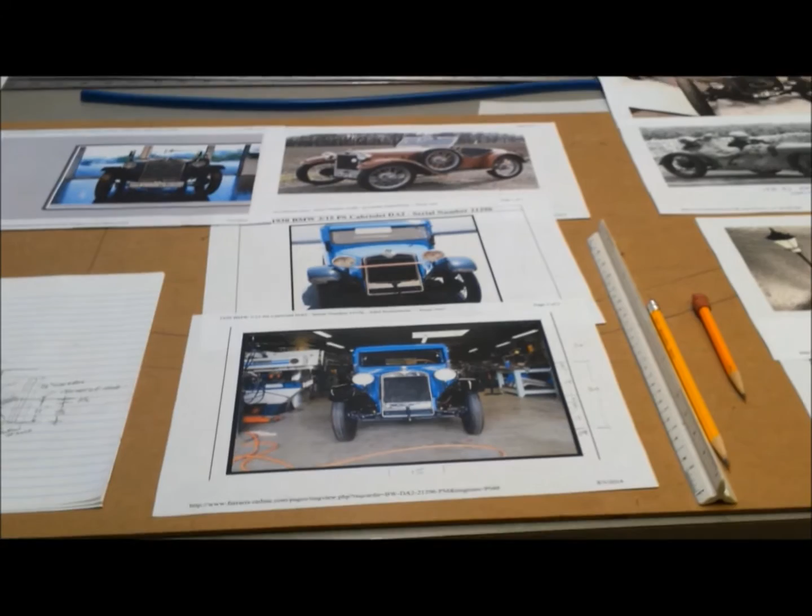Because this front suspension is different than my other two carts, it's a little bit more challenging than first time around. So I've been studying, and I went and printed some more photographs. I'm really trying to get a feel for the front suspension.

Here's a finished view, what it should look like. Try to get it somewhat in scale. Here's another view that helps. And then I've already seen this one. And in the course of printing photos, I came across a few more shots that'll help me when I'm trying to get the body to look the way I want. There's a nice one. Here's one from above.

Cute little car. There was also a racing version, special racing version. I think it's a body kit that somebody sold. But here's another racing version without the fenders. So anyway, and there's one more picture there, which I thought was a nice shot.

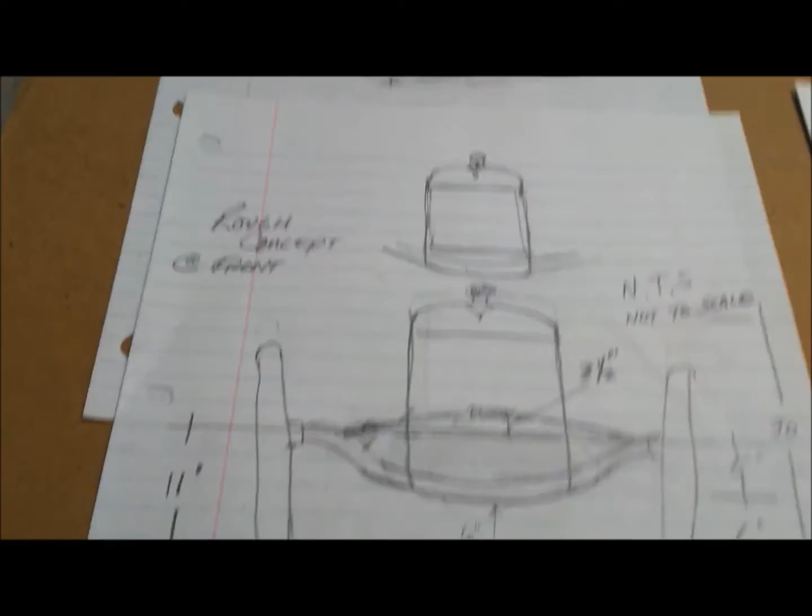Okay, so where I left off last time on getting this front suspension right was this drawing here. But I really hadn't studied the photos that close, so I did a couple of sketches, trying to figure out where the axle comes through, concept. This one's not to scale. I've got one of Brian's axles here, and I have a Brian spring on the cart that he's working on, so I was able to get some measurements.

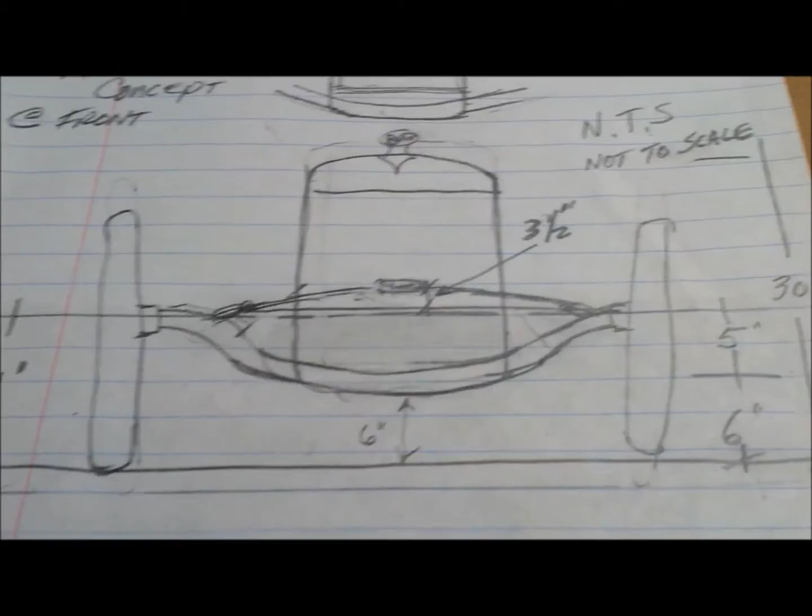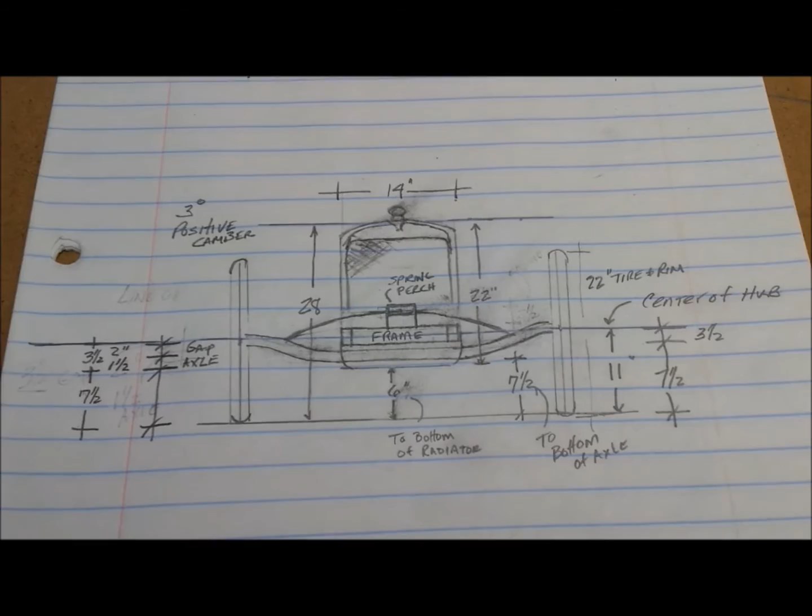So I know that it's 3.5 inches from the spring, the arc, the height of the arc, so that helped. So anyway, this was pretty rough. So then I got serious about trying to do a true scale sketch with what I've learned about the height of the spring and where the axle goes through the bottom of the radiator. And then I tried to get it to fit a Cyclekart, at least the height I want.

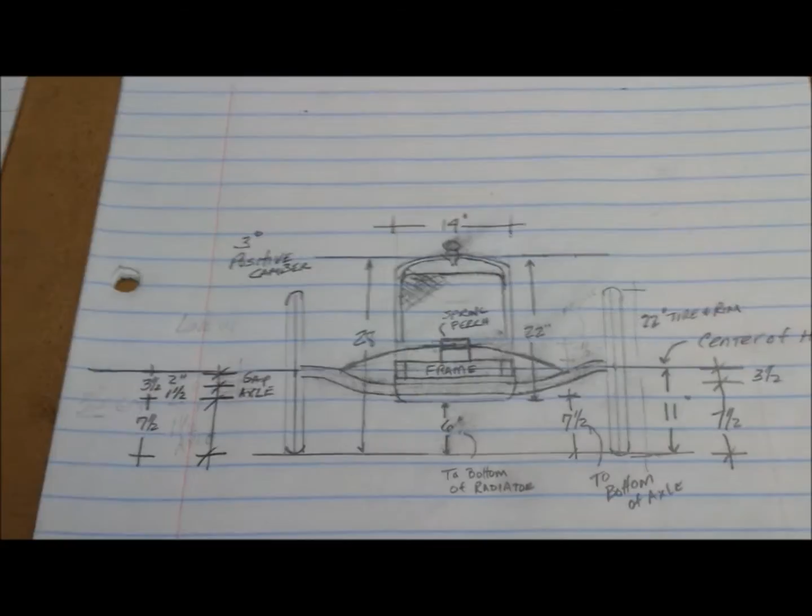I'm trying to get 28 here and 14 in width. And then I was shooting for around 6 inches off the ground there. Right now the axle's at 7.5 off the ground, and the bottom of the radiator's at 6. The configuration is a little bit different than the real car, but hey, it's a Cyclekart. I got to make it work.

So I might draw this a little bit larger. Maybe I'll draw it out. I've got a piece of hardboard under here that I started doing a drawing on, so maybe I'll draw this out full size. Because one thing that concerns me is the height of this spring. The spring perch is way up in here, so I need to do a side view of this off of this drawing, and that'll clean up the body height, because it looks like the frame, geez, that's above.

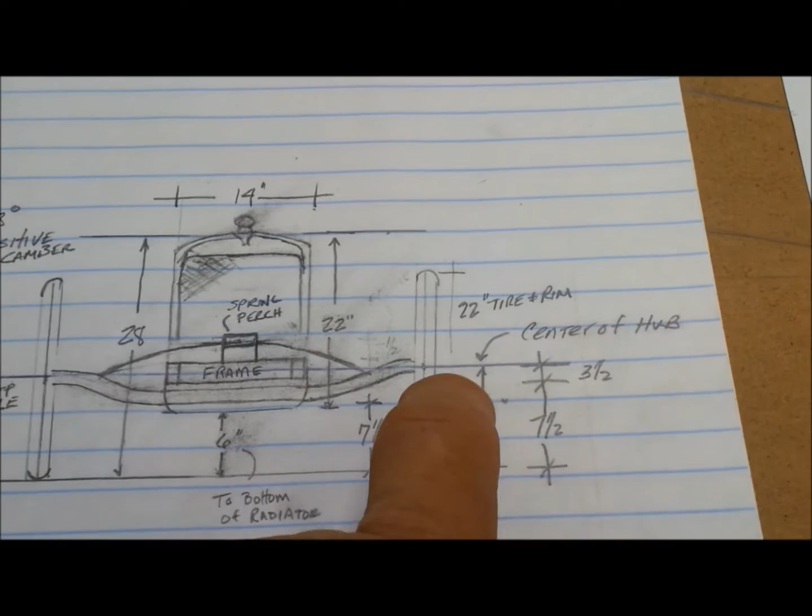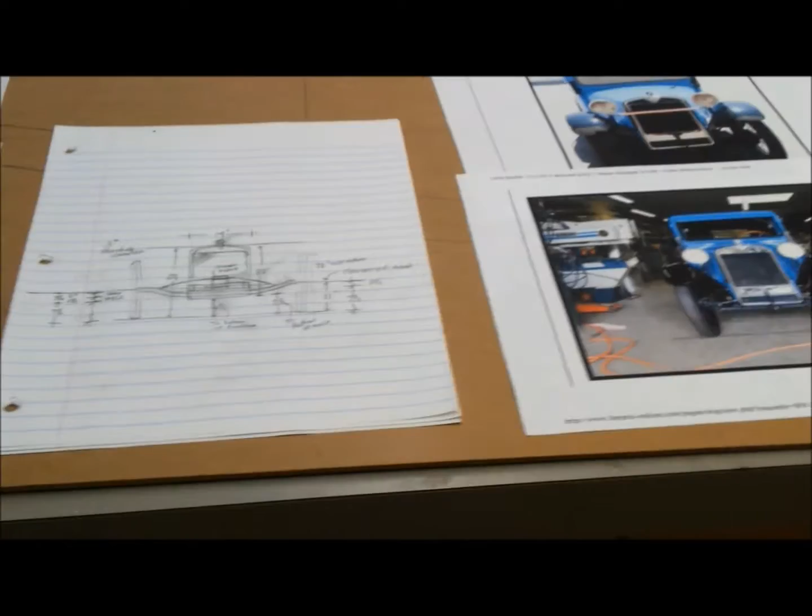Right now the frame splits the height, the center of the hub, which is the way my other Cyclekarts are pretty much. So I'm a little concerned about the height of that perch there, but a larger drawing, full size, will help put that to rest, and then a side view. So that's looking better. So we'll keep plugging away. I got to do a little bit more. I'm not there yet, so we'll see what happens next.

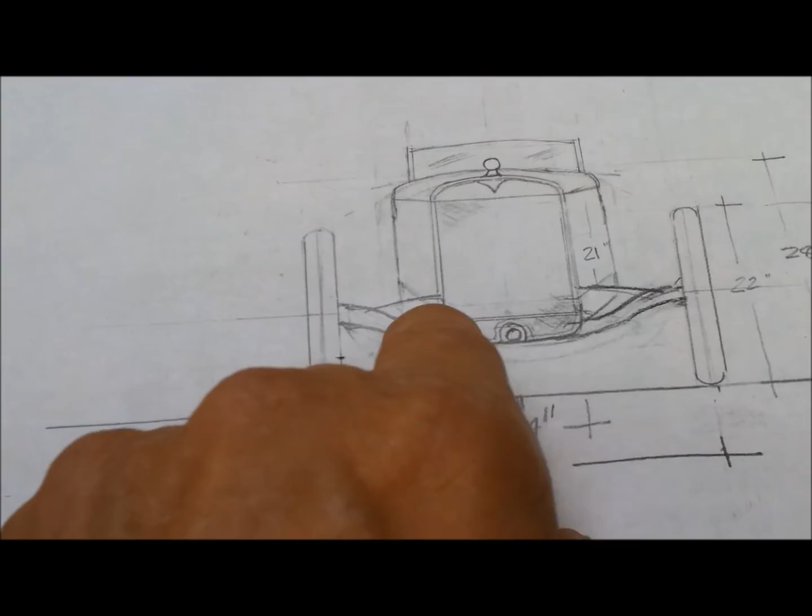I've been continuing to work on this front suspension design. So you'd seen this sketch where the front axle kind of curves and goes under the radiator, and then the springs come out the side of the body. And then I had done this version in scale, and you can see how the frame is splitting the center line of the axle, which is the same as my other Cyclekarts, and then the spring perch is up here. But the axle still kind of has this shape. That could be a straight axle, and it might be eventually.

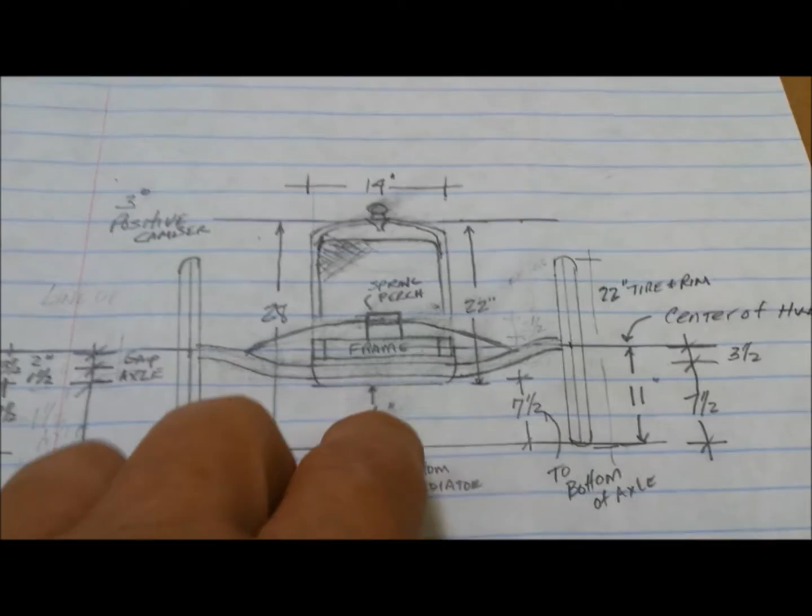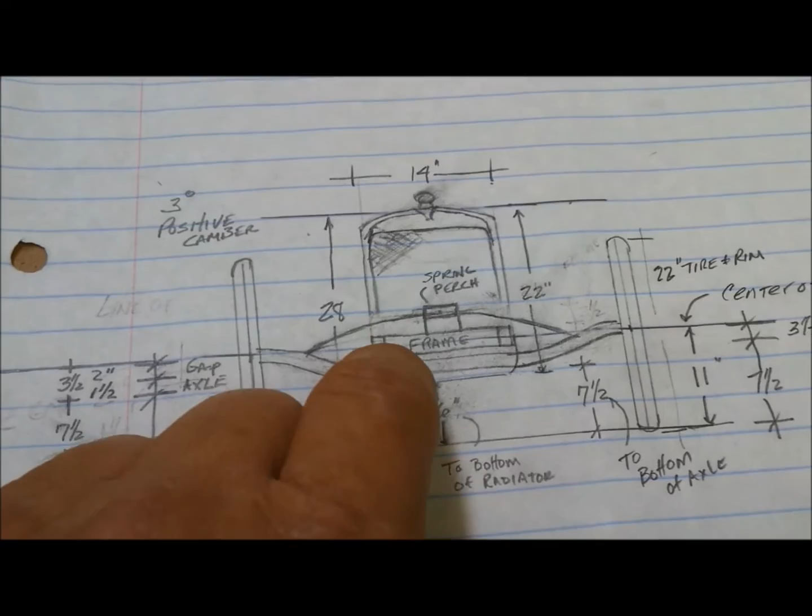So then I wanted to go to a larger version, and I got to thinking about this frame design here. In this version, the frame's here, and I was going to make the frame come up to the height of the perch. But then I got to thinking that if I bring these frame members all the way up to where the curve starts on the radiator, right here, now the body, when I bring the body up, I'll have a place to just attach it right here and here.

And then this would be 1x3, same as the frame. So it would split right in the middle of that. So I could make this little shroud, a radiator. It's kind of hollow and thin, lightweight, but it would slip over the front of this whole structure and butt up against the body on this flat section here. Here I'd bend a piece of steel or aluminum to create the hoop. But this would cover all of this, and the spring and the axle would just exit the side of the body.

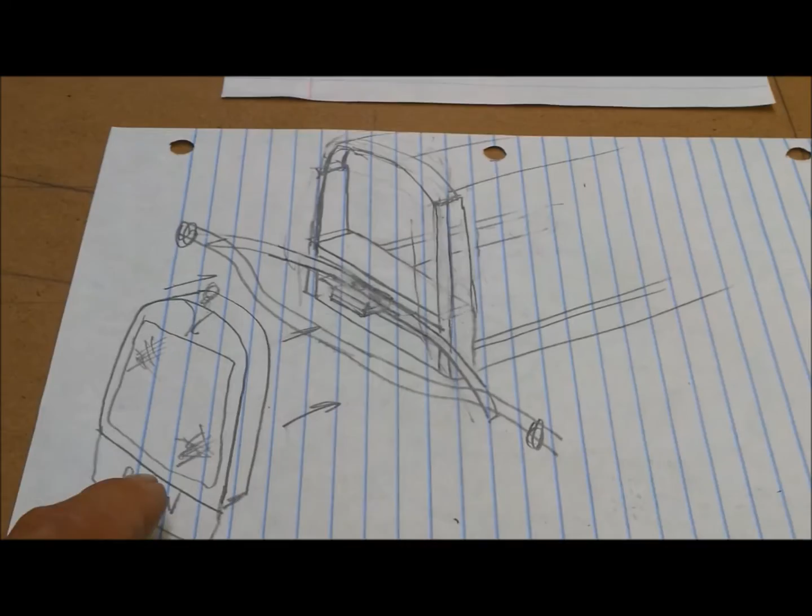So I'm kind of heading in that direction right now. So I did a larger version here. This drawing is 3 inches to the foot, and this is a piece of ledger paper, 11 by 17. So I was able to sneak up and get a little closer.

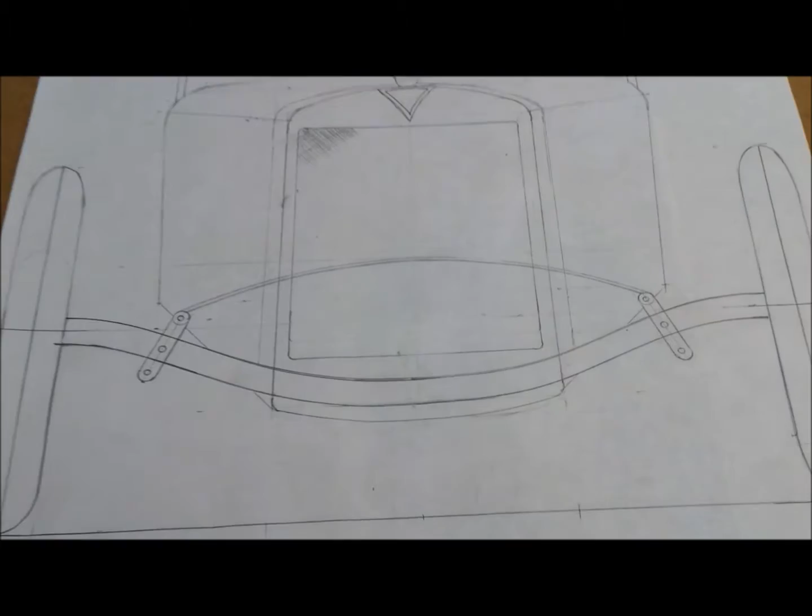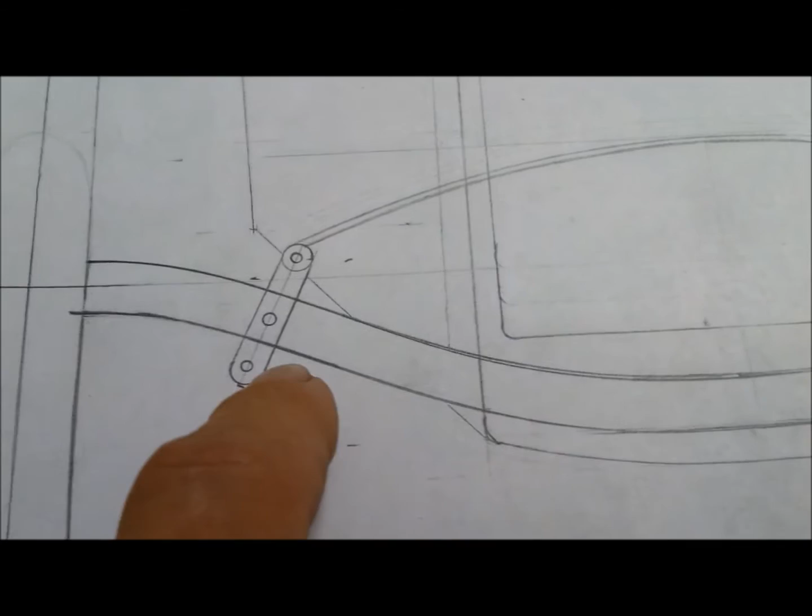I should have put dimensions on this so you could see it, but basically this is 6 inches off the ground. The spring is 15 inches off the ground, and then I came up with these little spring shackles. I've seen this done on another Cyclekart. Of course, that's how they do it on a full-size car. And right now I'm currently going with this curved axle, because that particular shape, as a mandrel bent piece, is a piece of cake. They could do that no problem.

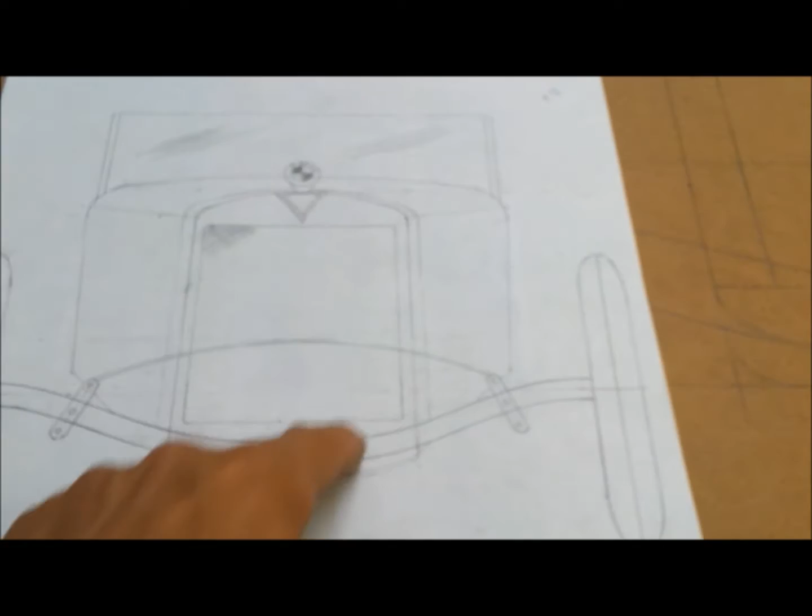And then I was working on getting the scale looking reasonably decent. So I think that looks all right. That's 28 inches off the ground. And then the width of this body is 28 back with the driver's position. So I'm sneaking up on it. I need to superimpose the frame in here and the perch and the other pieces, so maybe I'll make a copy of this and I can white out some of the lines and then just draw the frame without the radiator in the way.

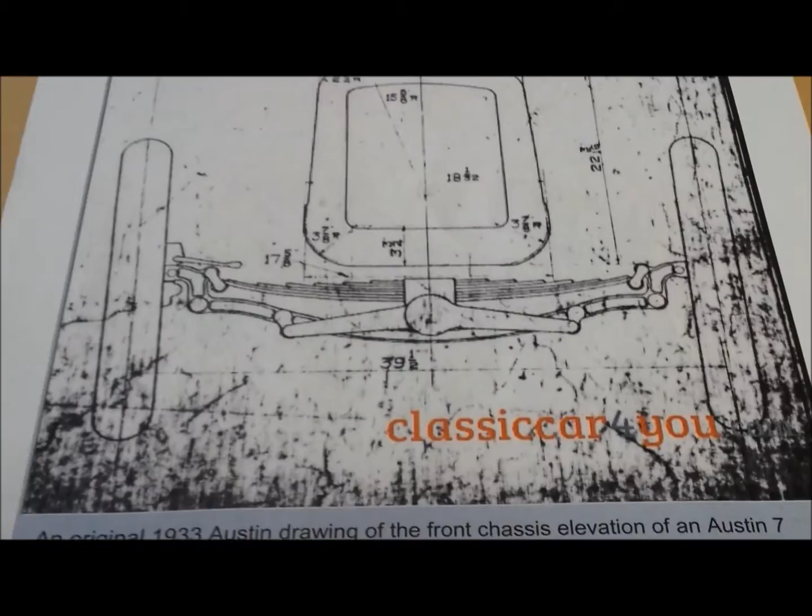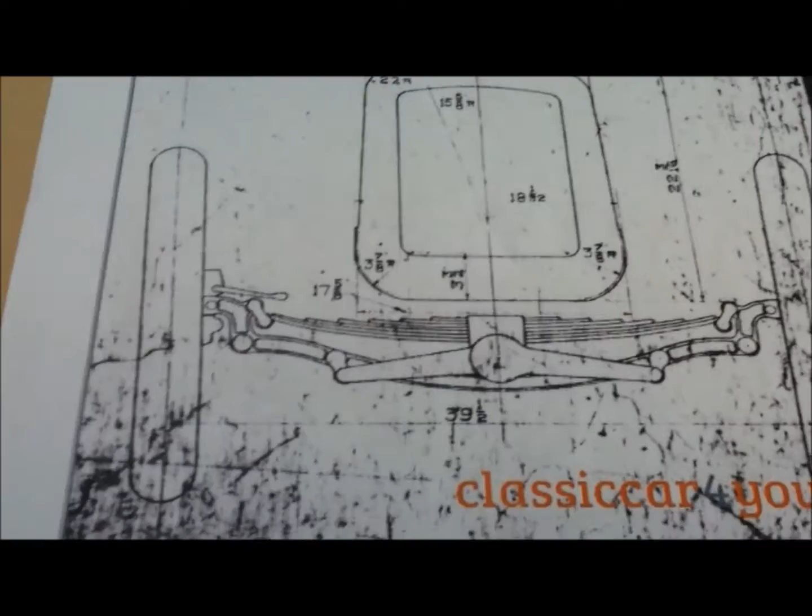So I found a blueprint of sorts of a 1933 Austin 7, which showed the front suspension. And it was actually this drawing that got me going in this direction. You see how the axle kind of swoops down and goes over? Now that's kind of why this one does that. Now the spring is different. This one runs in this arc, where this is a Cyclekart setup.

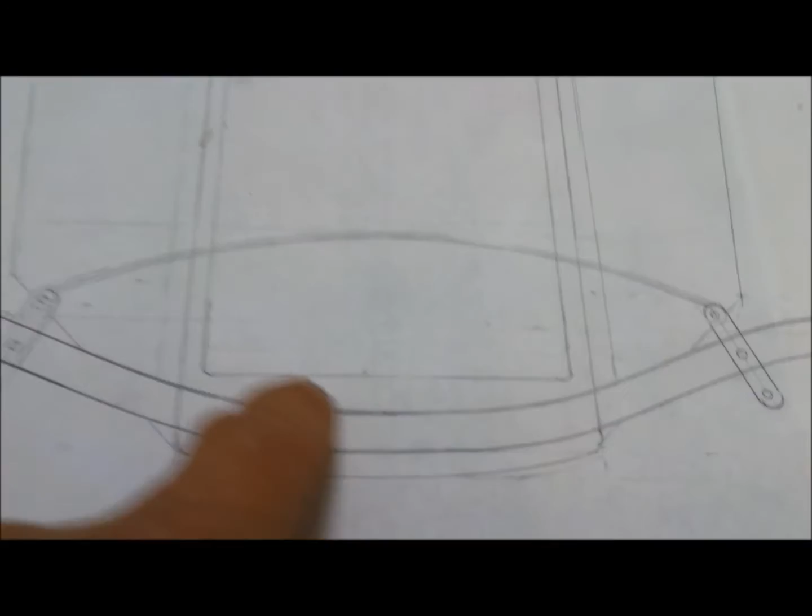And then these are friction shocks, which I could probably add in here at a later date once I figure out how soft this is. I kind of know how soft it'll be from the other Cyclekarts, but I've learned from Johnny Dumfries that you want as much suspension travel in the front as you can muster, because it keeps the wheels on the ground, and sure enough, I got plenty of travel on the monocar, and it handles great.

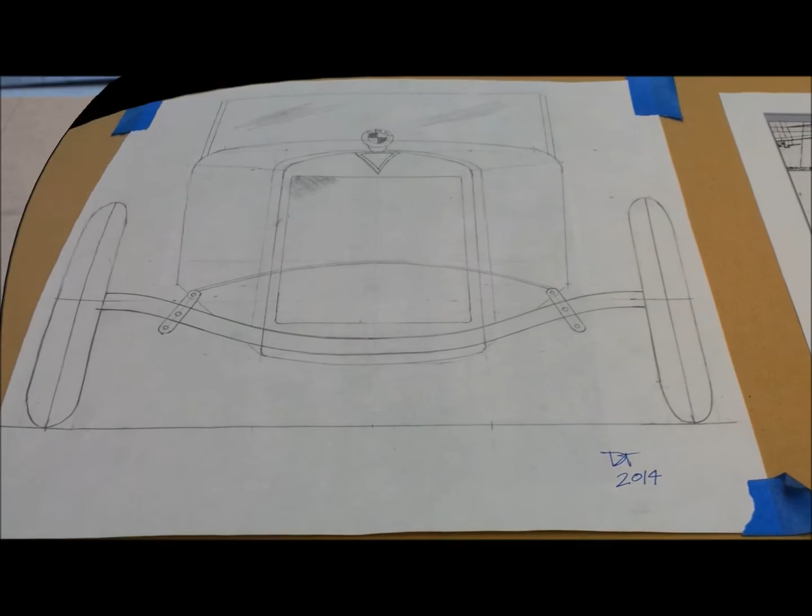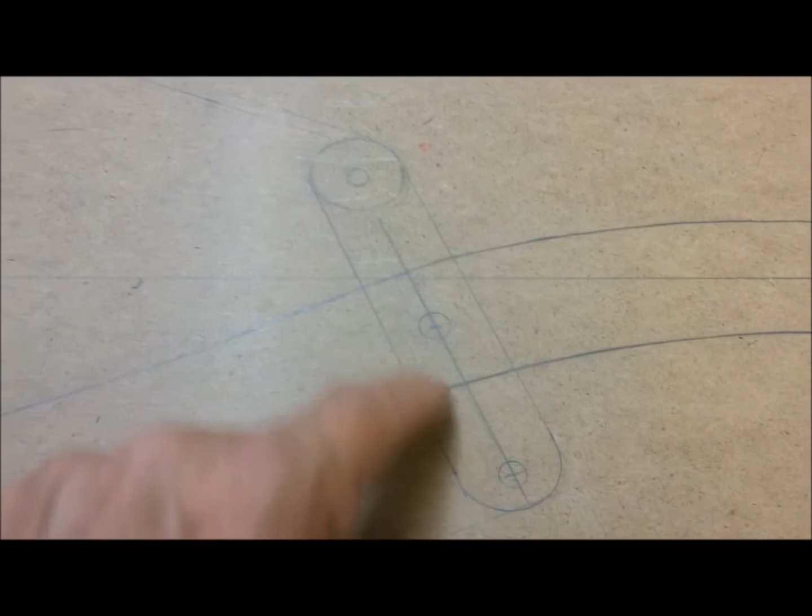So this is probably a little bit hard to see. The pencil lines aren't that dark, but this is full size. So there's the tire and the axle. I didn't draw the spindle bracket or anything. I know how that goes. I used this to figure out the size of this spring shackle, and I might refine this a little bit. I think it might be just a little bit too long. When you depress the spring, this moves maybe an inch, so it's probably a little on the large size.

And then I didn't draw the whole radiator. I just drew this lower half up to the height of this steel brace here. This is like a rubber block. I'll have a couple of bolts here. This will be all welded, and you can see how I'm using the 1x3 frame up to here and across and down. And in this drawing, I had to add a piece here, a double thickness. But now I'm starting to think, as I was saying earlier, that this piece here will go all the way up to the top of the radiator. Same thing on the other side.

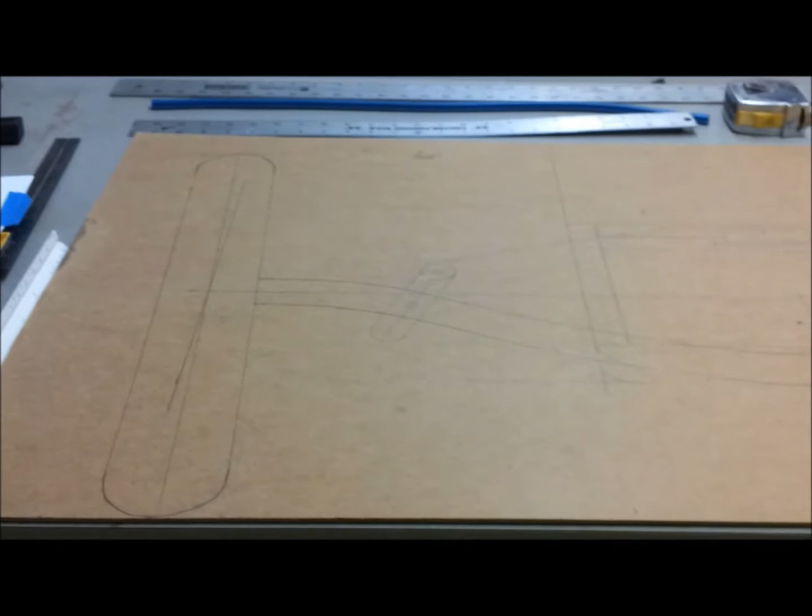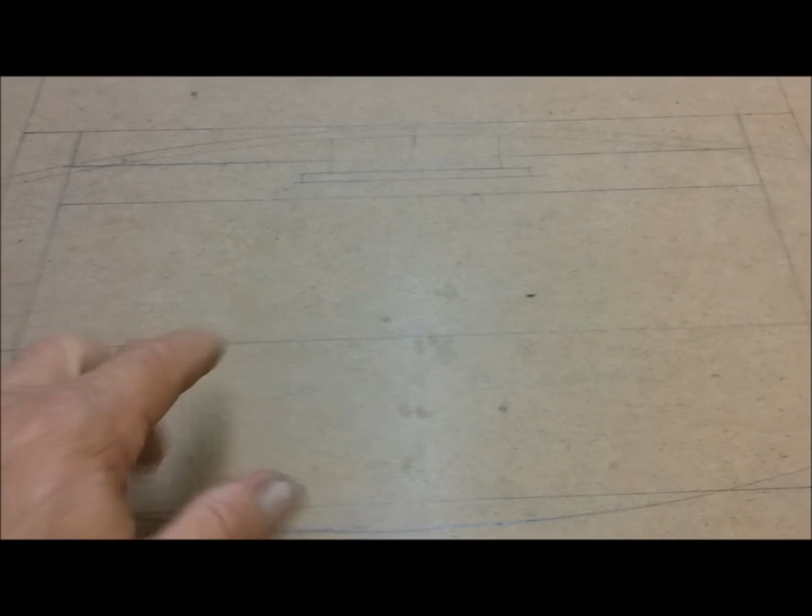So I'm going to draw a full-size side view here of the front suspension, probably the first 2 foot of the car. Right now, I'm also trying to get the frame. See, I haven't drawn the frame in here yet because I want the frame to be below the center line of the axle. I have some grandiose master plan here how to get the center of gravity down, so I don't know if it's going to work yet, but it just might, so I'll keep you informed as that comes along. So, side view next.

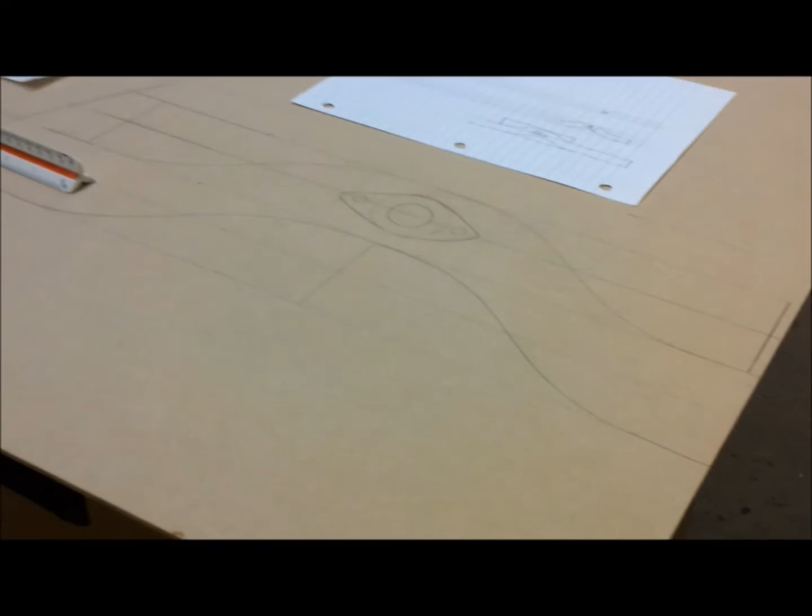I've made a little progress on my side view that I'm drawing here on this 1/8 inch piece of smooth hardboard. I use the rear part here. I'm working on the rear axle and frame, and then the front part here I'm drawing the front of the frame. Eventually, this drawing, when I'm happy with the design and I think it's what I'm going to build, I'll draw this full size on an 8-foot sheet. This one's only about 5 feet right now.

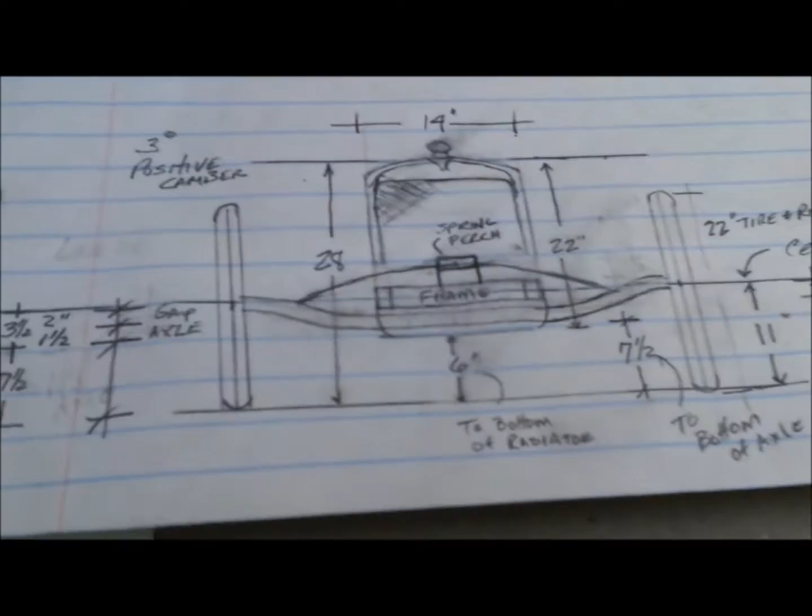So I got some things to show you here, but to recap, you recall I did this drawing and then a little bit better scale version of where I thought I was heading with it. Then drew it up 3 inch to the foot, see how it looks, and then I tried to draw it out here on the hardboard.

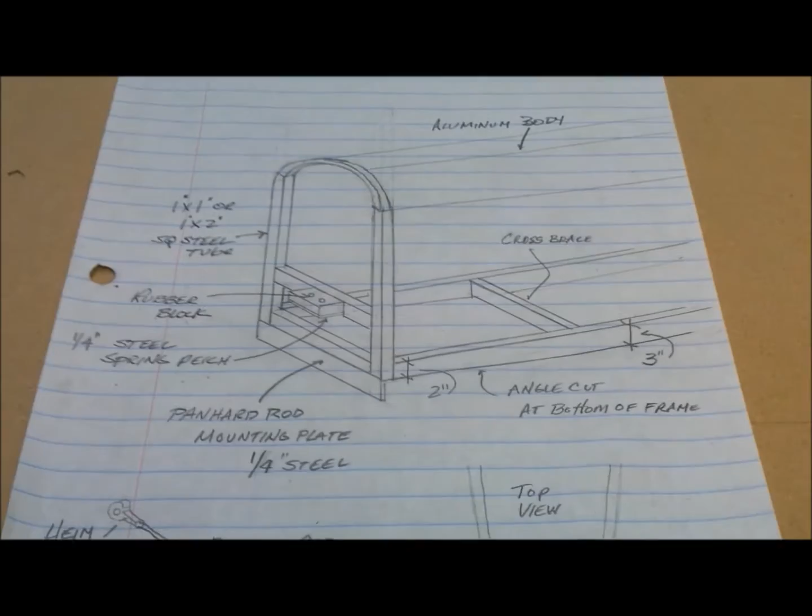But before I show you this, I did a sketch here, kind of a little ISO and a top view, to help you understand what this side view looks like. Okay, so here's the chassis coming in here. It's a 1x3 and a little cross brace.

And then in the photographs as I'm looking at the car, it appears that the frame runs uphill a little bit right at the front of the car. So I put it in there. It's out here at about 20 inches or so. It starts to taper to 2 inches right here in the front of the frame. Then, as I was saying yesterday, I'd run these side pieces all the way up to where the curve starts for the radiator. That provides a spot for the body to mount.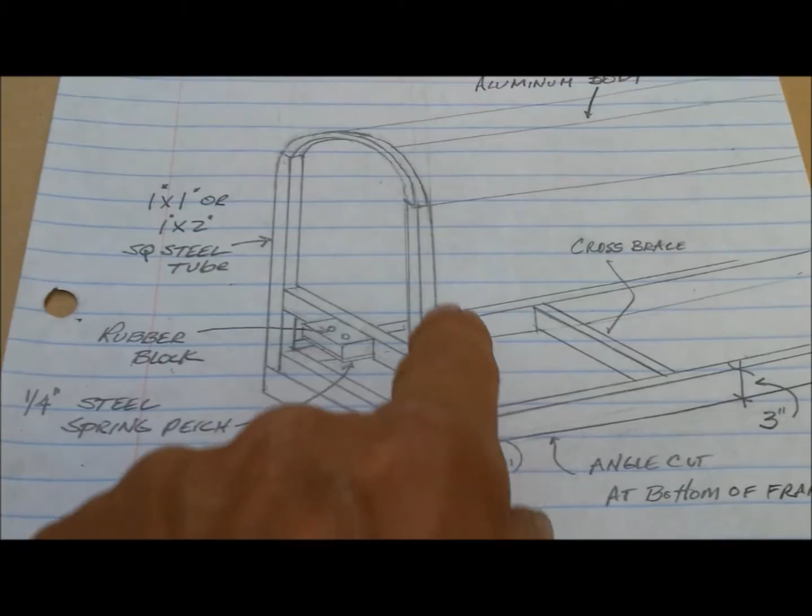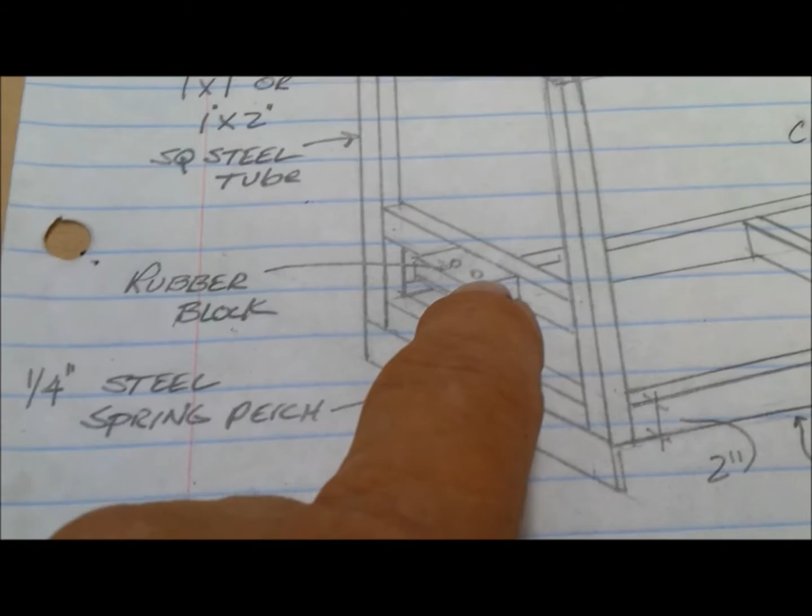Here's kind of the body. Aluminum is what I'm going to do. Then I put a cross brace right here. Now this carries the 1/4 inch steel spring perch and a rubber block. And right now I got the rubber block maybe 1 inch thick. It'd have to be fairly soft, have a couple of bolts through it, and maybe it'd be contoured to the spring shape a little bit.

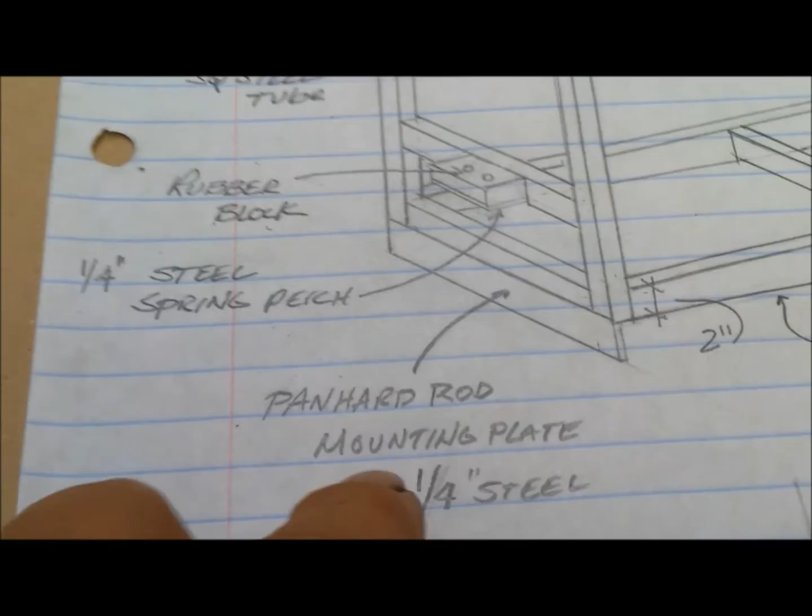This tubing, this vertical tubing, it could be 1x1, 1x2, 1x3. I don't want it to be too heavy, but I'd like it to be stout because the front of these carts takes a lot of stress. So there's the perch and the block. Now, to keep the axle from moving side to side, it needs a panhard rod. And that panhard rod, let me show you this top view.

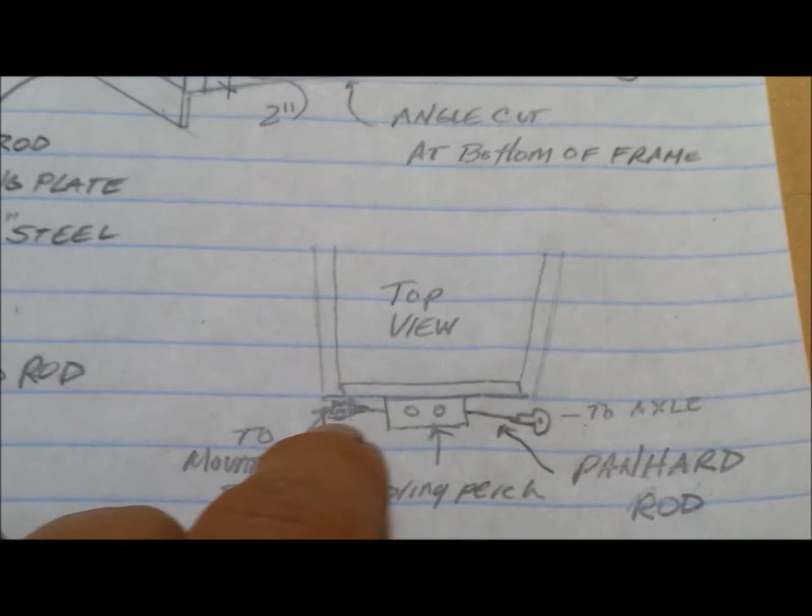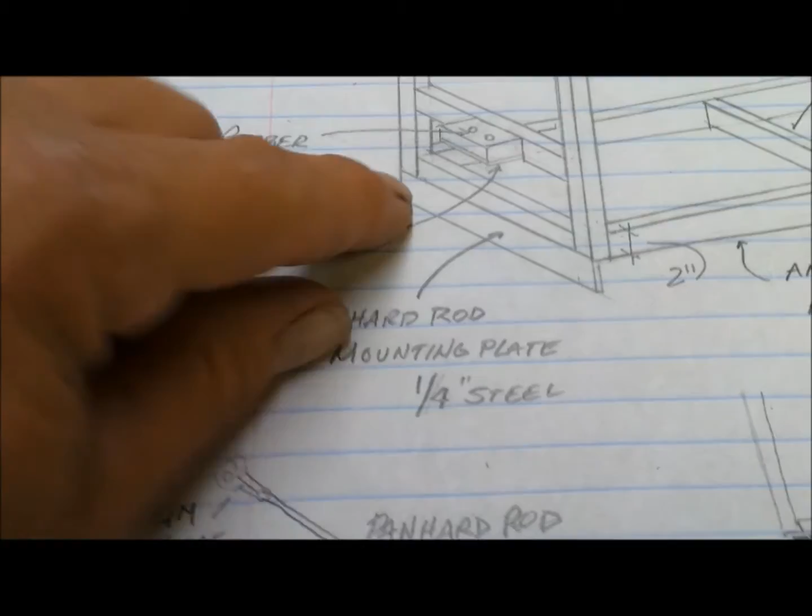See, here's looking down on the frame. There's the spring perch and the block. And the axle runs right in front of that perch. I didn't draw it in here, but the panhard rod is kind of right in there. So the panhard rod, I'd have heim joints on it so I could adjust it. 5/16 ought to be stout enough. And it would move up and down. One would be mounted here. The other would be mounted on this side to the axle on the same plane as the axle, which shows up in the side view on the hardboard here.

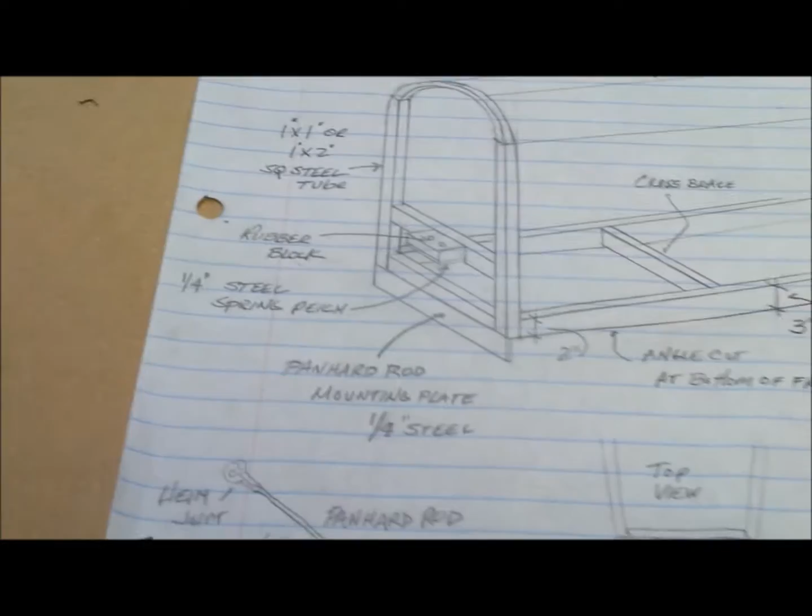So that's the concept for creating the front of the car. It gives a place for the spring to mount, the panhard rod to mount, and then the way this is built here allows the radiator shroud to kind of capture all of it so that if it ever needed service, take out a few screws, the whole front of the radiator kind of comes off, it's like a tin can, so to speak, and exposes everything for easy service. So that'd be kind of nice, I think.

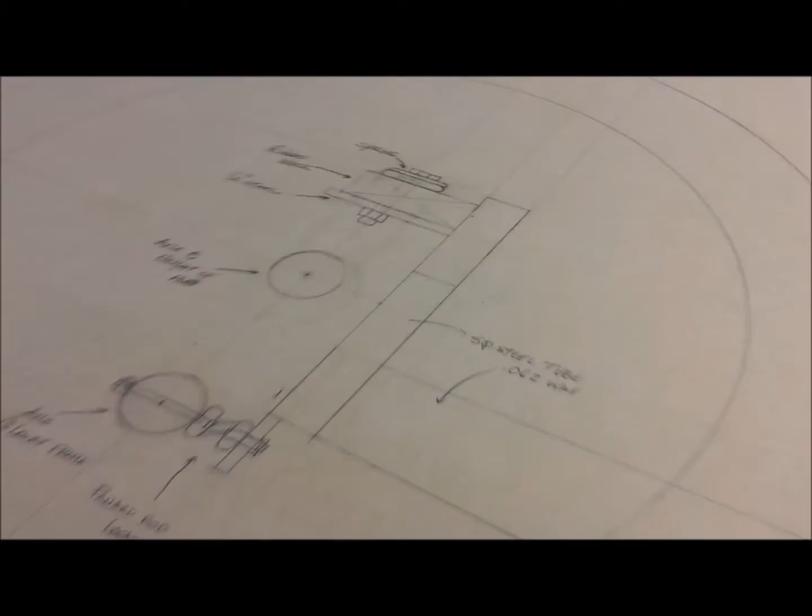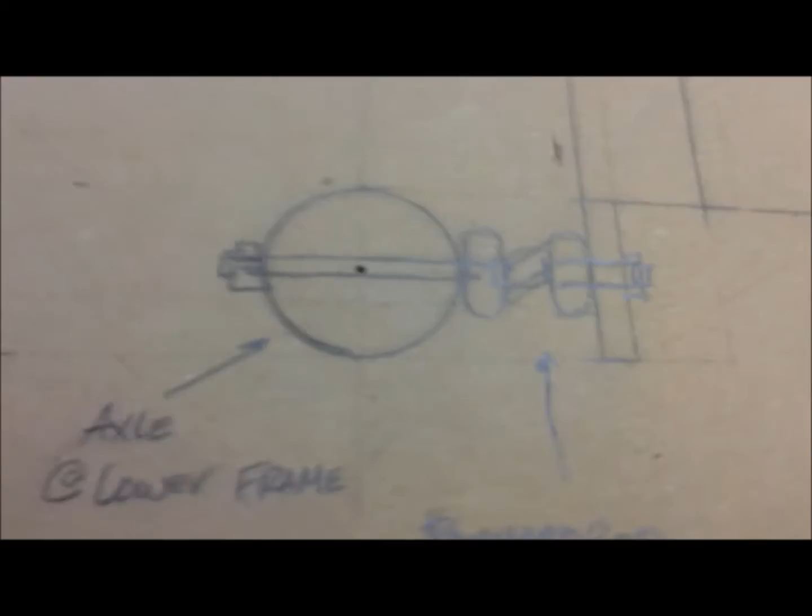So, okay, let's see here. I'll show you this drawing here in more detail in just a sec. All right, so this is a full-size drawing from my 1 inch to the foot sketches. So this tire and wheel here is 22 inches. And the axle is 1 5/8. This is the axle at the lower frame. That's the height. And I wanted 6 inches, so I've got the 6 inches I wanted here.

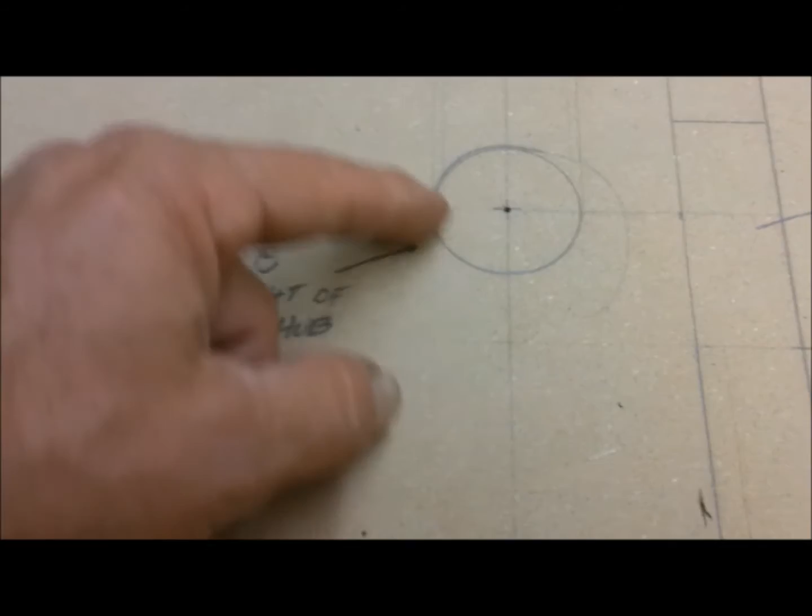And then this is the axle at the hub height. This line's kind of faint, but that's 11 inches off the ground. So that's the location when it's out at the spindle. And then you can see some light lines here. That represents the spring. So here is the 1/4 inch steel perch. All be welded nice and stout right here. And then I just chose a 1 inch thick block, fairly soft. Then that represents the spring and a couple of bolts that go through.

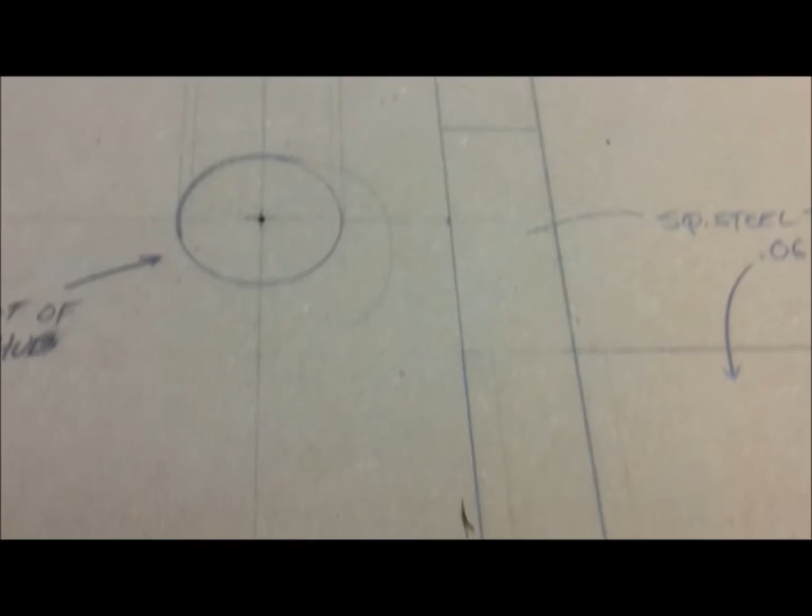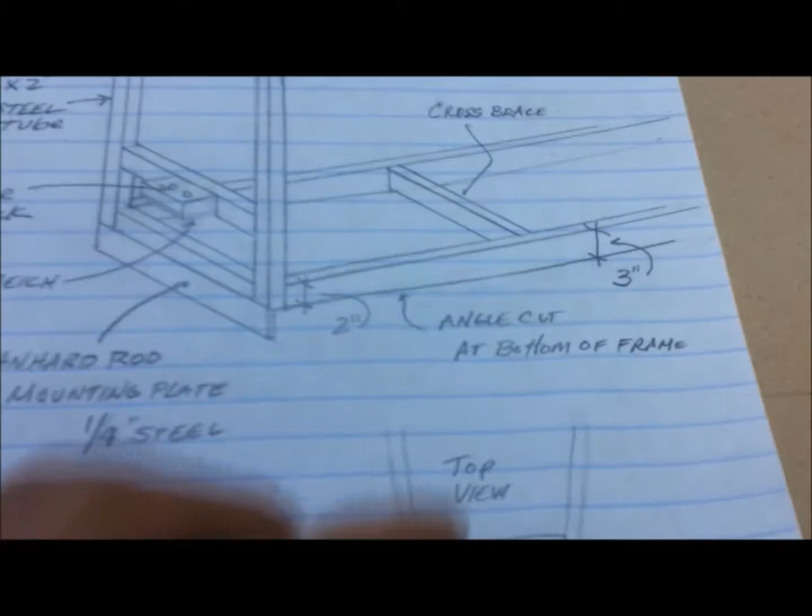And then this is the frame. I've drawn it as a 1x2, but it goes up. Here's the top of the body, right there. And then this line, that's just a reference line here. Okay, so now down at the, I think I showed you here. This is where the frame is 2 inches here, and back here a little further, it's 3 inches, and that shows up right here. 3 inches back here, 2 inches here for that little taper. It's kind of an aesthetic thing for me, anyway.

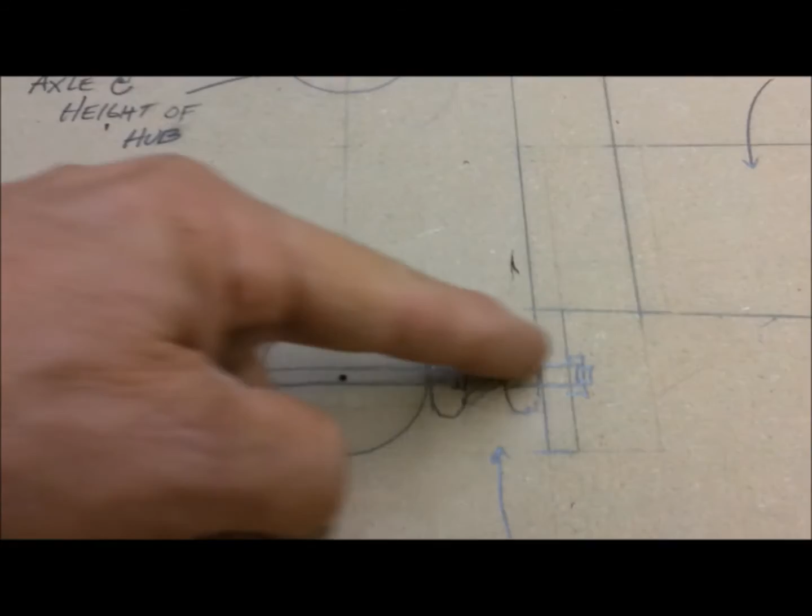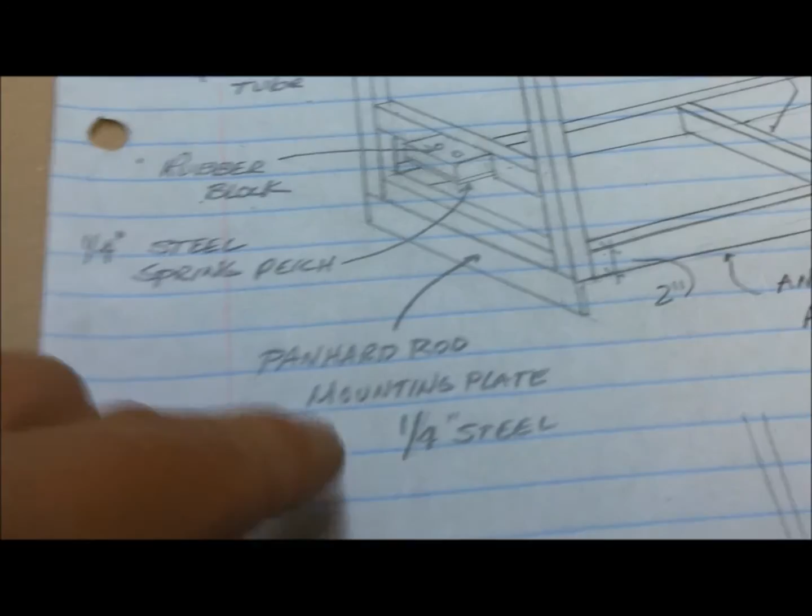So right down at the bottom of the frame is the axle, right in the center of the frame. So the panhard rod needs to be on the same plane as the axle. So once I started drawing on this thing, I realized I got to leave a gap there for the panhard rod, and the axle is below the frame right here. So I came up with this little steel plate, which shows up right there. So that's where the panhard rod will mount and keep the front axle from moving side to side.

So the rear of the frame, I was going to try to do a little experimenting here, and that's the beauty of drawing it out. If I don't like it, I can erase it or sand all the pencil lines off and start over. But let me show you my concept. So you've seen this one. This is my tracing, and if you notice right here, the frame, which is 3 inches, splits the center of the hub. And that's exactly the way it is on my other 2 carts.

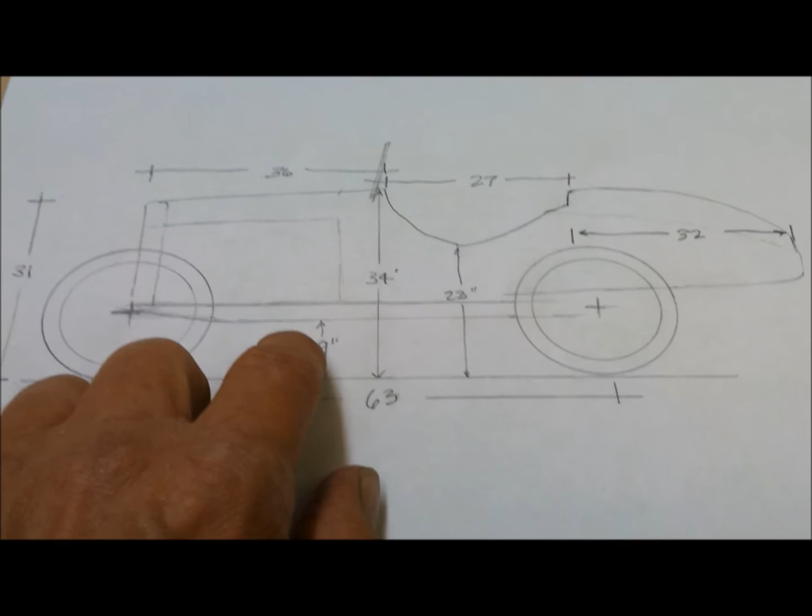But I have this grandiose scheme to drop the center of gravity. So I was thinking, all right, well, what if I just move the frame down 3 inches? So then, if you look here, here's the center of the hub, 11 inches, and the center of the frame is 3 inches lower than that. So this is an experiment, and it's still above the axle, which is 6 inches.

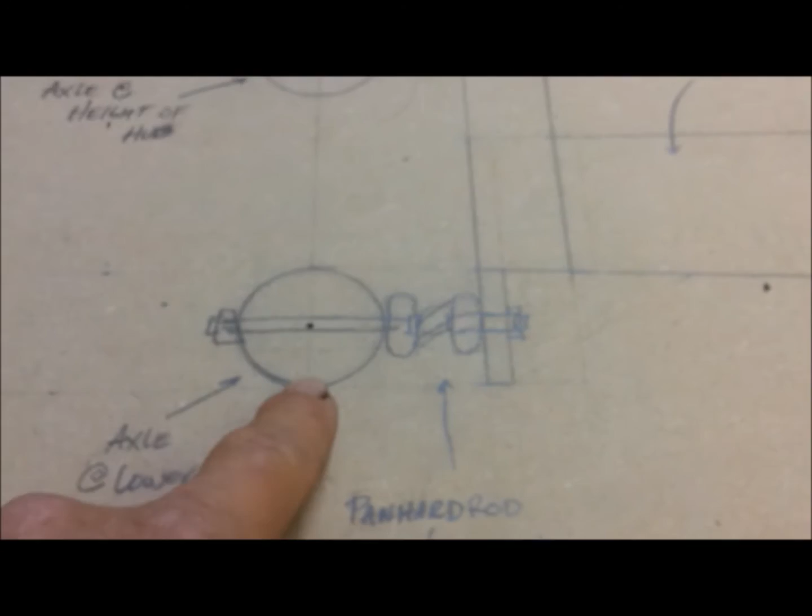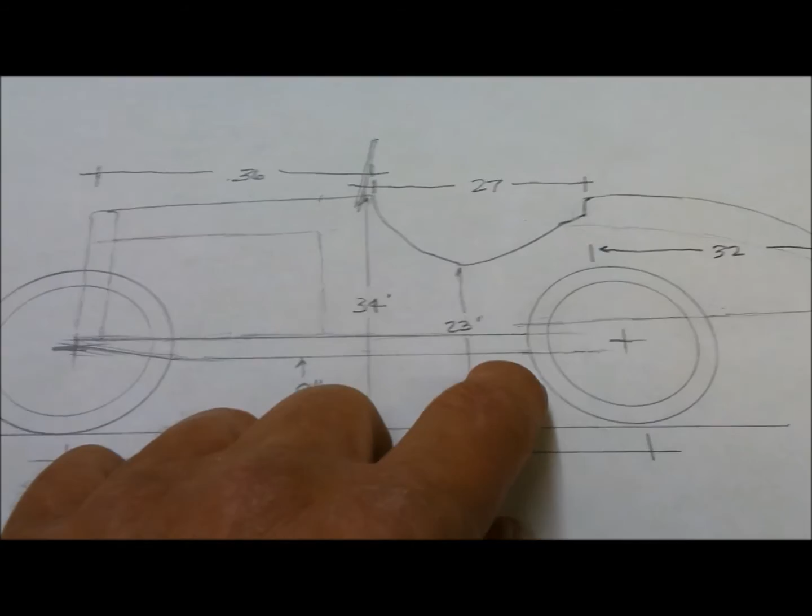It's interesting to note that to get the center of gravity on the monocar lower, I built a wooden tub that was 5 inches below the frame. So that's how I was able to get the CG down. And then the wood tub came along and tapered up. But in this car, the body covers the frame. The frame is going to be inside the line of the body, and so wherever that bottom of the frame is, that's the bottom of the body.

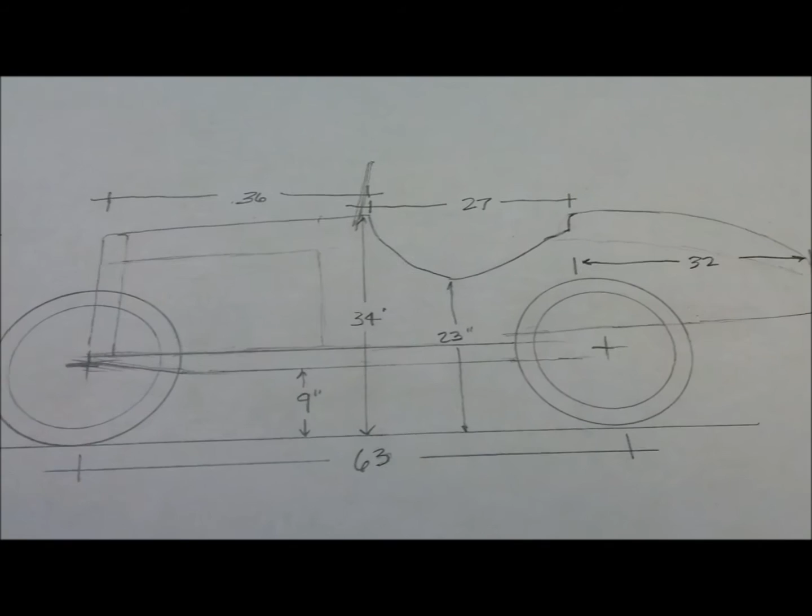So I thought, well, okay, maybe I'll just drop this down, see if it'll work. It'll be nice and low, 6 inches off the ground. The monocar is 5 inches off the ground. I haven't hit anything with it. The front axle is 5.5 off the ground. So I know it's a workable height, that's 6 inches.

So I showed you this, where I've shown the frame 3 inches to the center. Now, how do I get the rear at 3 inches? Because if I just drop the front, I'm going to have quite a bit of rake. I don't want that. I pretty much want it on the same plane. So here I kind of did a little sketch. So I have the frame, and then I weld another piece on top of it of the same tubing, and then I cut the shape. And then I cap that with some 16 gauge steel.

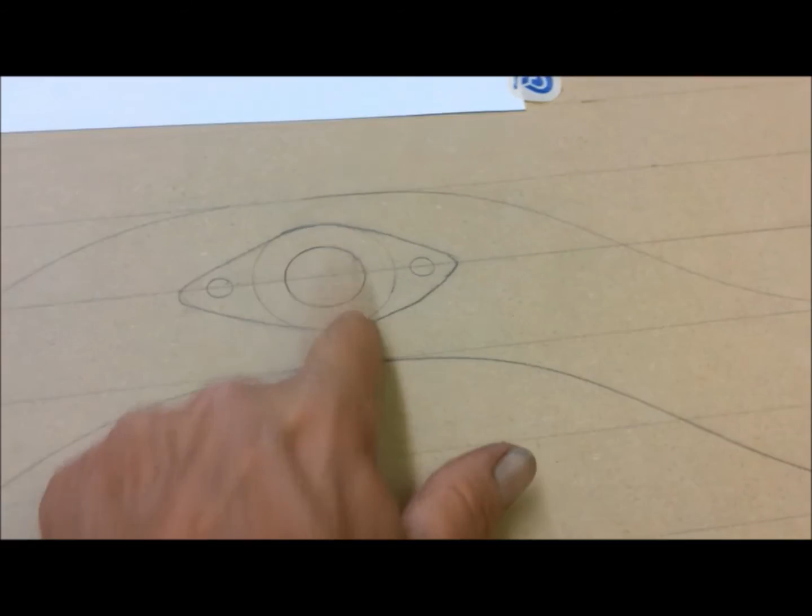So now I would have this arrangement here. It's not perfectly drawn, but you see the concept. So the frame still is at 6 inches, but the axle is back up at the hub height. So I thought that might work. Now, there is another way of doing this. Let's see, let me grab this here.

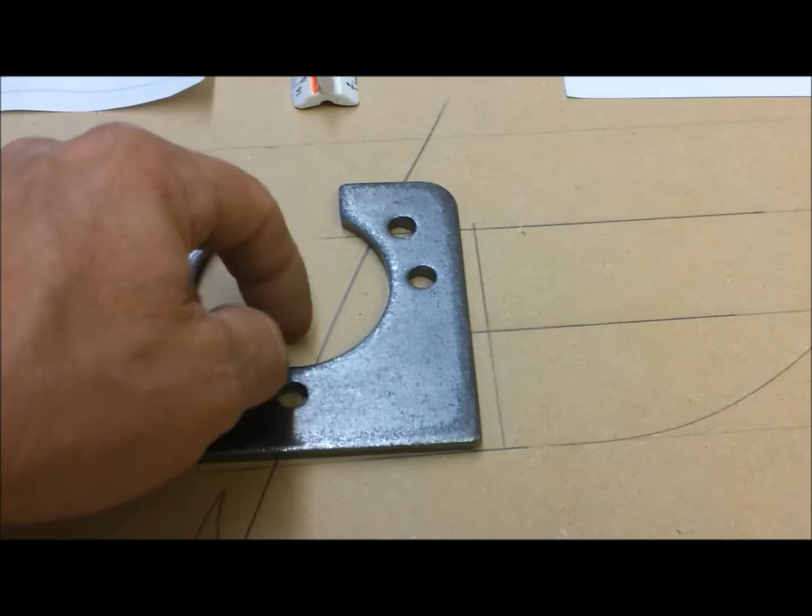Okay, so when you buy these bearings here, you get one of these. I guess these are for go-karts, and you weld them on to something, I don't know exactly. But in this scenario, you would have the frame, and this would mount right here on top of the 3-inch frame, weld it all up. Then the axle and bearing drops in here. So I could accomplish the same goal of having this axle in line with the hub using this. And it'd actually be easy to get it out of there. You unbolt it and get it out.

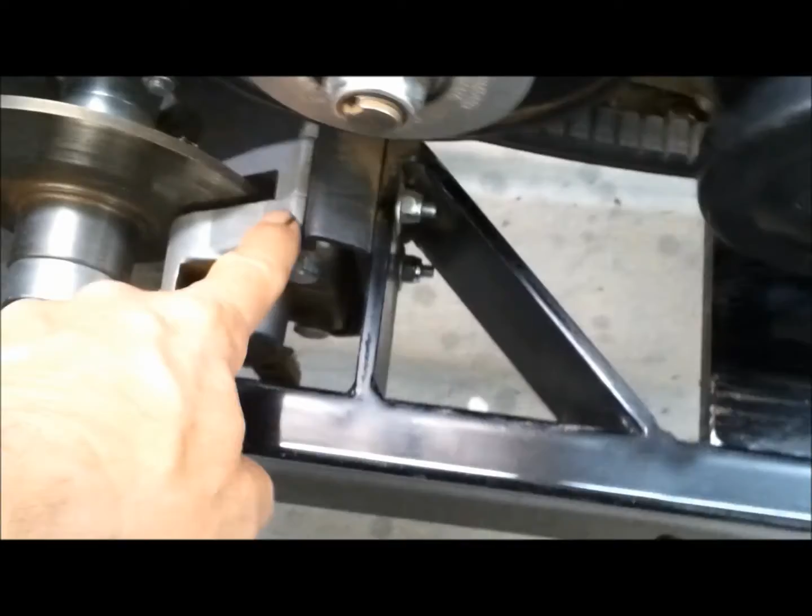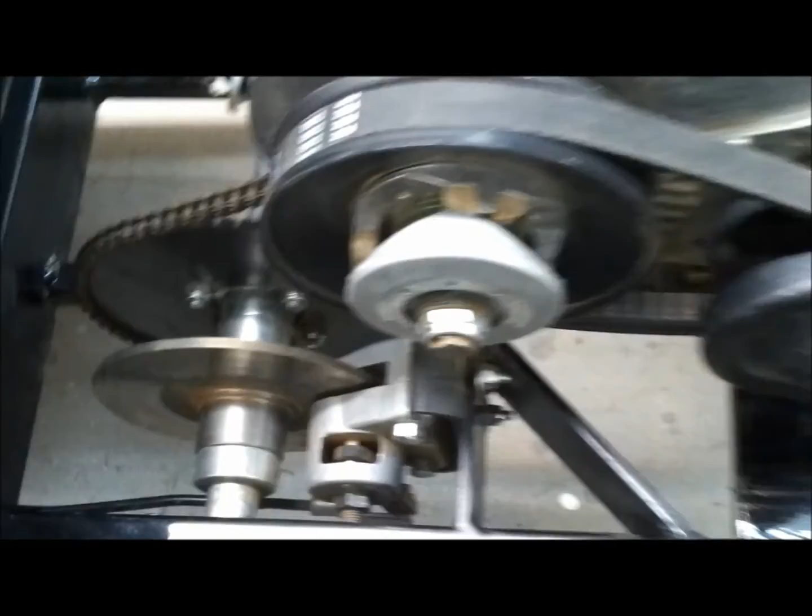But I got to thinking, when I go to mount the disc brake, I weld the bracket here on the side of the frame. Here, I'll just walk over here and show you on the monocar. See here how the disc brake is mounted to a bracket that's on the frame. Well, if I mount that piece of steel here, now I've got to fabricate something to get the disc brake up to that height. So I'm not particularly wild about trying to create more weight and more of a bracket so that the disc brake is on this plane.

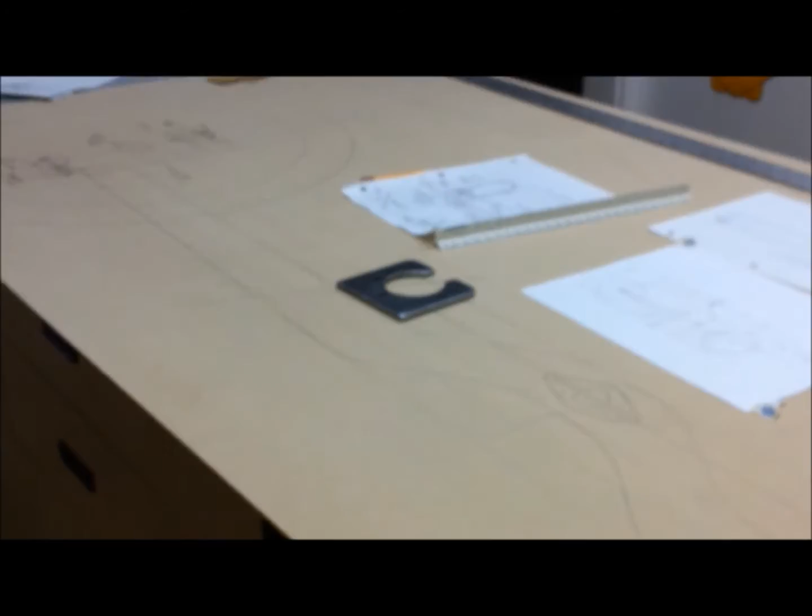So I thought, well, I could do this, and if I design this frame right, the disc brake can be here, still welded to the frame in the proper place, because the rod comes through just below the frame. So that's the whole idea of drawing it out full size, because you can see if it looks like it's going to work. Now, if I just said, screw this, I'd just erase it, and I could go back to a typical frame going right through the center of the hub.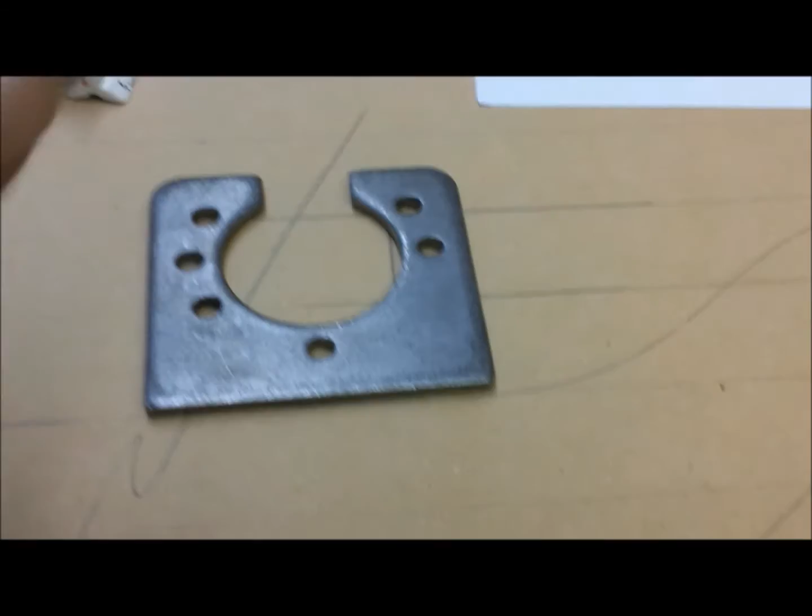Now that puts the frame at, what is it, 11, 10, 9.5 off the ground. It would be 9.5 off the ground if the frame is on the center of the hub. But I want it at 6 inches off the ground.

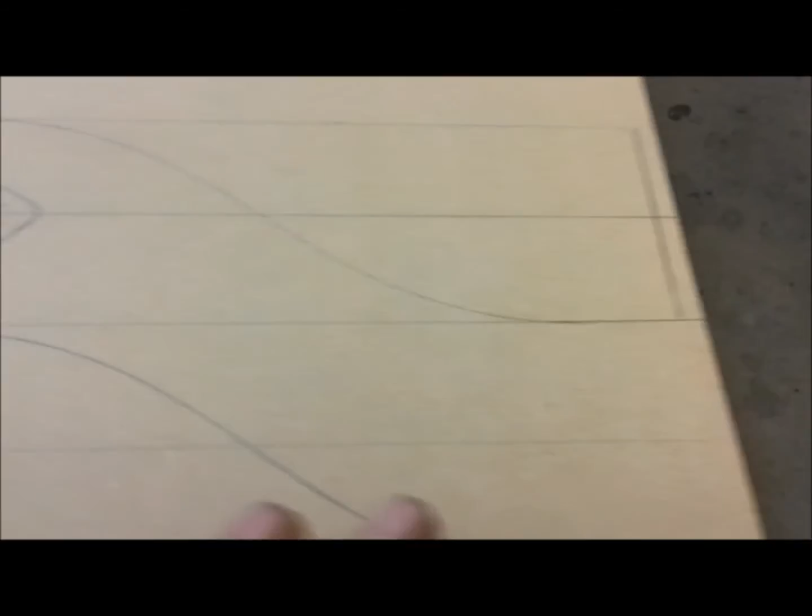Now I'm sitting 3 inches lower, and because the frame comes back down, the engine is 3 inches lower. Now we've got quite a bit of weight below the line of the hub, and I'm telling you, when you're doing 40 and you want to crank a turn and get the back end to slide way out, it's nice having that low CG. So let's see, I need to draw a top view.

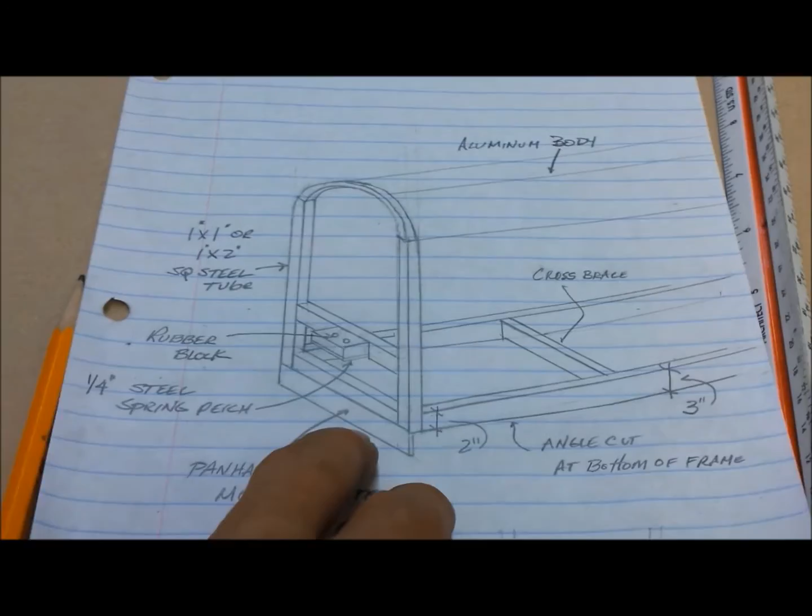You know, I did the ISO, so now you can see the concept, and I could draw a top view, which will show this a little bit better in larger size, so then I could really land on a measurement. I went and measured the Heim joints. They're the same thing that's used on the steering knuckles, steering arms, the tie rods. So that'd be a go-kart component. That's something you can buy.

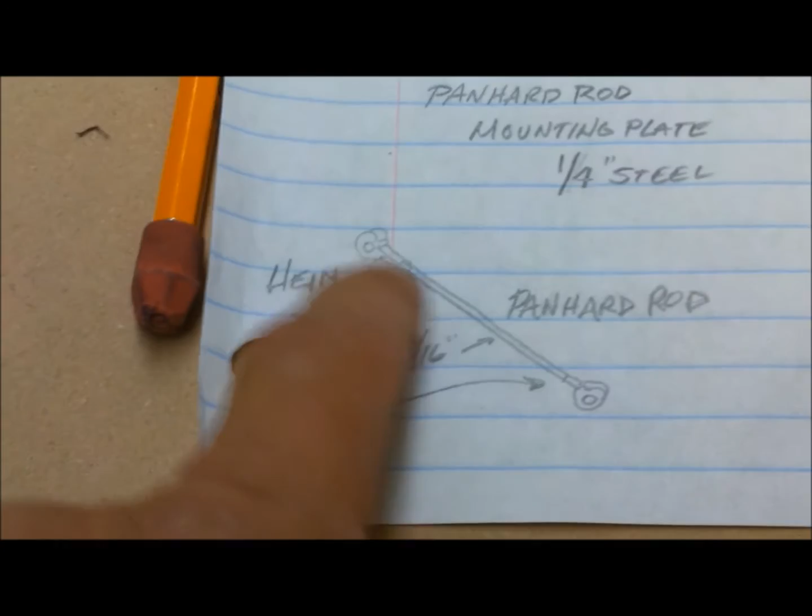And then they sell panhard rods. I've seen them in hot rod magazines. But we could make this up out of a go-kart component. And if you wanted to make it heavier, you could thread your own rod. So not too big a deal. So anyway, I think I'm going to work on a top view now.

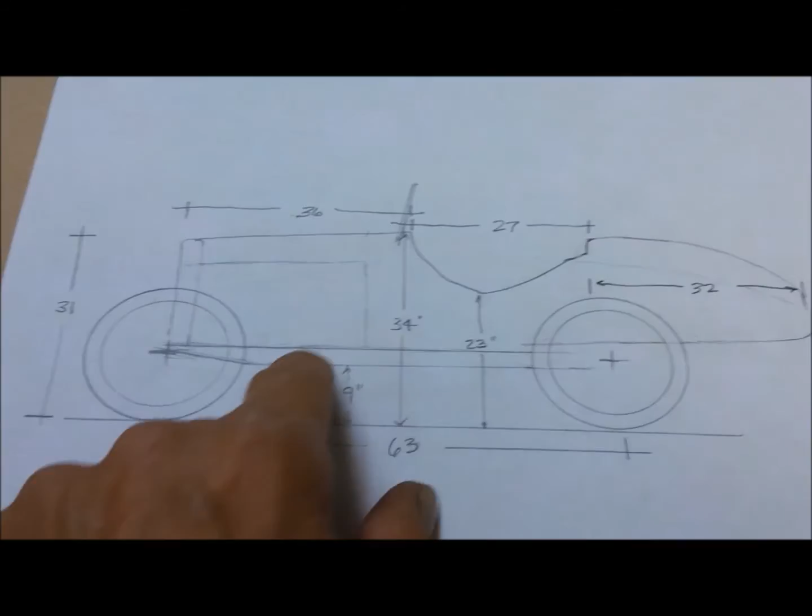Yeah, and I need to draw this body. I need to move it down and get it at 6 inches, because I like the proportions of this body. So let's see. I'll mess with this a little bit and see if I can get it down 3 inches lower, and we'll see how that looks. All right, continuing on. This is fun.

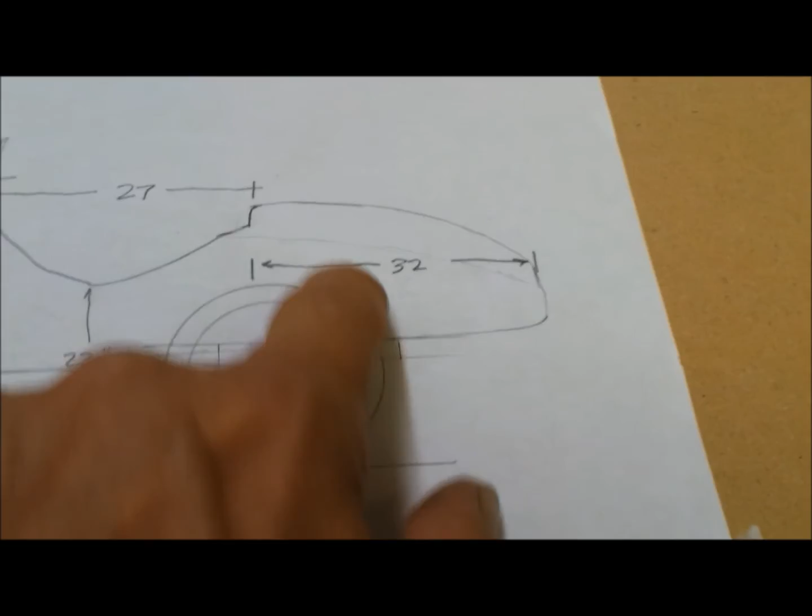One thing I forgot to mention just briefly here is, let's say I decided to run this frame straight back and not have it drop back down. Well, with this particular design of the car, see how the rear body is up high? The bottom of the body's down here, and then when you get past the seat, the body is considerably higher. Well, I could run that frame straight through, not drop down. The motor would still fit. And the CG would still be low because I'm the heaviest thing in the kart.

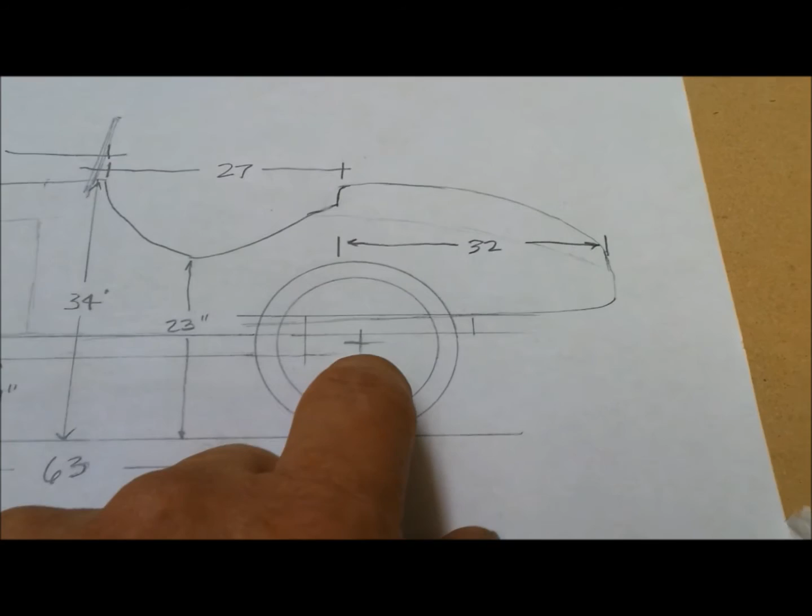And one interesting measurement you should be aware of is the center of the crankshaft on the engine should be, as a good starting point, 10 inches from the center of the axle. That's what it is on old number 27, and it's pretty close to that on the monocar. I did it slightly different. On the monocar, I moved the engine a little further back and dropped it a little further down into the frame, and boy, it worked out good.

So I might just continue this straight because it really fits the design of the car better. And then the frame would stop just as soon as I got the motor in there. Boom, the frame would stop, and then there wouldn't be any frame out here. So, okay, I thought I'd mention that. I was going to a minute ago.

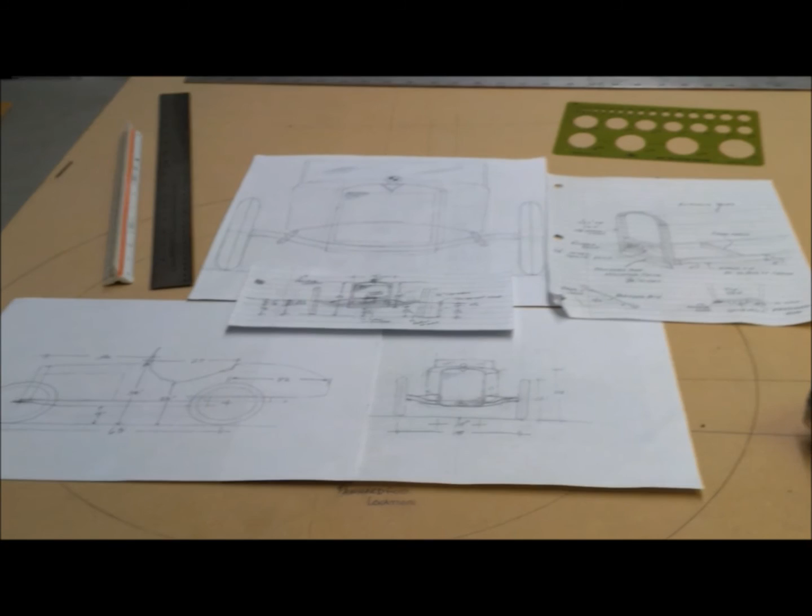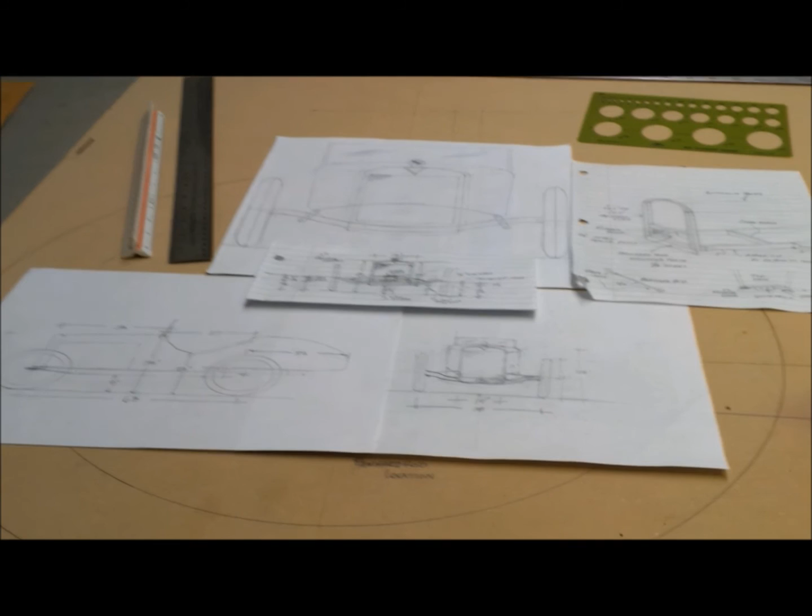All right. I failed to mention that this is the end of the second video in the design series. So if any of you guys are sitting on the fence thinking about building a Cyclekart, shoot, jump on in and you can build along with me. I don't have any problem if you want to copy my design exactly. I do this because I want to promote the sport of cyclekarting just for fun. It's a great hobby and a lot of enjoyment. And if you build a cart, you're going to be the only one in the neighborhood that has one. You're going to be immediately popular, because I've come to find out that kids and adults of all ages love cyclekarts.

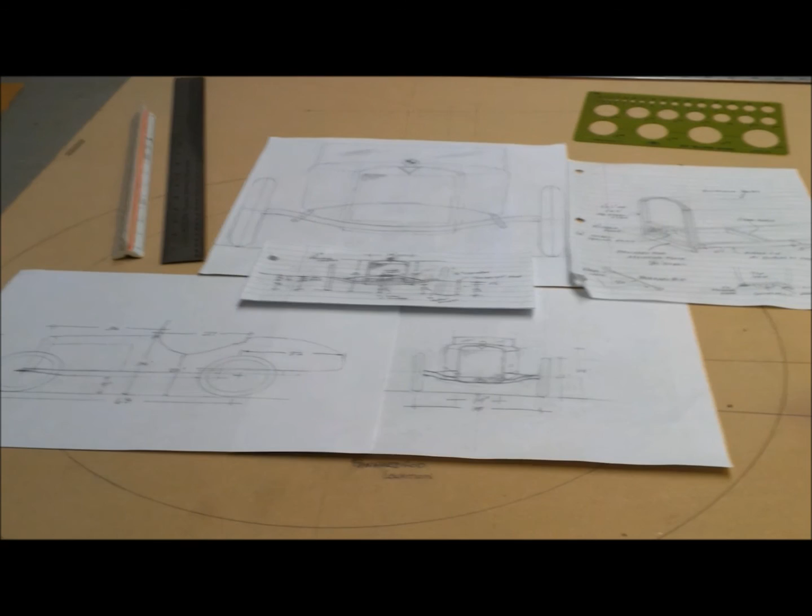So you've got time to get involved, because old number 27 took me 12 months to build. The monocar took me 10, so I wouldn't be surprised if this one took me 10 months too. But during the process, I'm going to try to show you if I can pull it off. I'm going to build the chassis, build the body. You can follow along. I'll figure out a way to show you all the components, where I get them, how much they cost. We'll talk concepts. So it'll be a lot of fun. So if you want to join in, come on along.

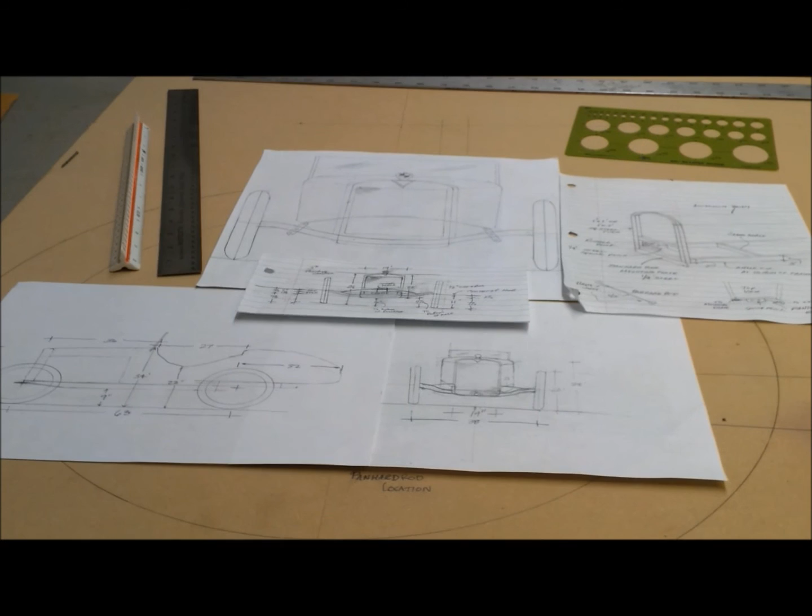So when I get about 25 to 30 minutes of video, then I post it to YouTube. So, like I say, this is the end of the second video. Don't know how many it's going to take to get this design, but we'll just keep plugging away because I like it. It's fun. So, all right.